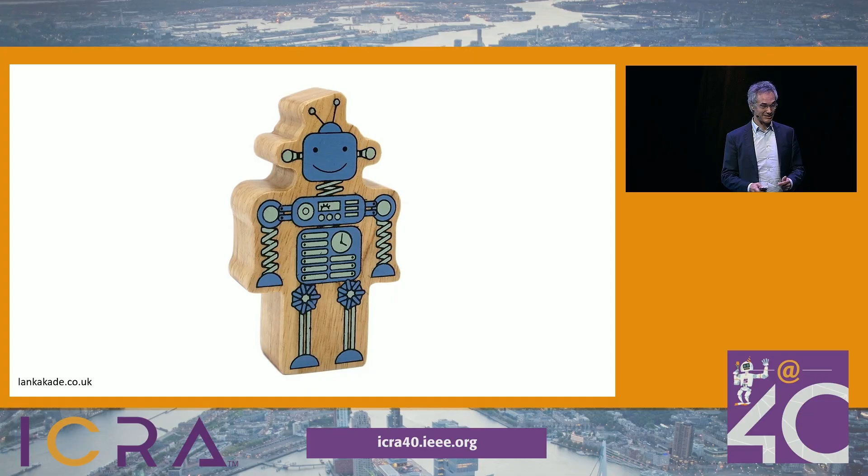Thanks a lot for the very kind introduction. Thanks a lot for having me here. I've been working with robots since 40 years. Okay, that's stretching it maybe a little bit. That's the kind of robots I was interested in back then. I was really busy working on my fundamental motor skills, grasping and these kind of things that enable me now to deal with these kind of situations.

I believe we're still quite a few years away from robots being able to deal with these kind of things, so let's take a look at a slightly more structured environment, like in a supermarket. Doesn't look too bad. We should be able to solve that with good old-fashioned engineering. Almost, but not quite. So maybe a little bit of learning can save the day.

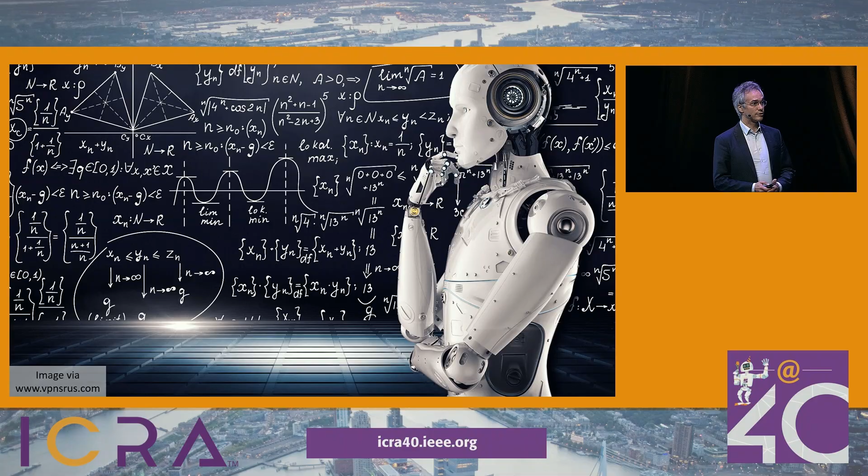We've already heard quite a few talks about robot learning, so I'm going to be very brief. You've heard a lot about imitation learning, the idea of learning from human demonstrations, or reinforcement learning, where the robot is learning by trial and error on its own.

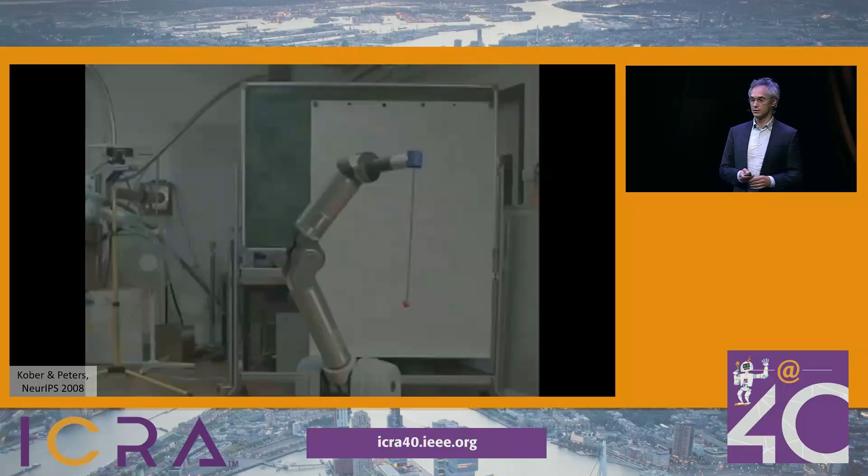Jan already showed this video on the first day, combining imitation learning with reinforcement learning. That kind of gets us in the right ballpark. It takes some 50 trials or so until it gets the ball in the cup the first time, but then another few trials until it's very reliable. What we don't show you in this video, and which is also not in the paper, is how many times Katharina needed to practice until she could show a nice demonstration, and also not how many hours I spent on fine-tuning the reward function to avoid that it gets stuck in some kind of a local optimum.

Now, if we look back again on how humans teach and learn, you'll notice that it's quite different. You won't have a teacher provide just some initial demonstrations or an initial reward function, and then the student or the robot is on its own. Rather, you're going to have intermittent interactions. You have a teacher, a parent, a caregiver, and so forth that are going to provide additional demonstrations, corrections, tips on what to practice, and so forth. You also have that for adults, and even when teaching other agents like this cute dog.

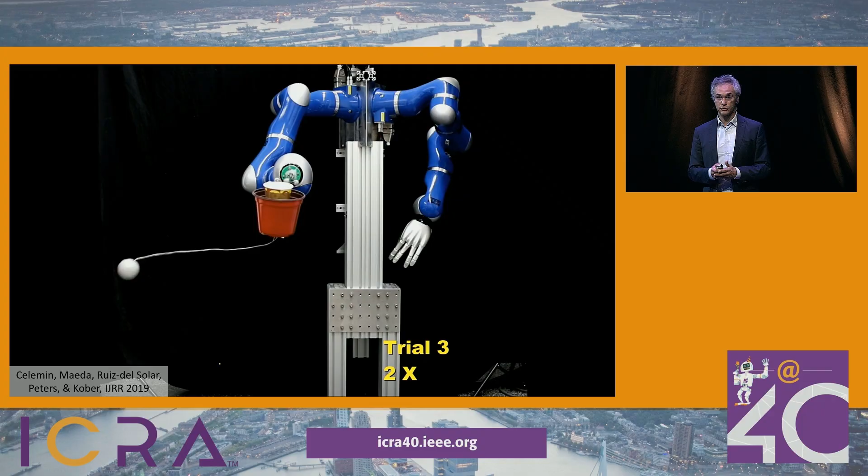So, I believe that introducing this idea is really going to be beneficial also for robot learning. So let's see how that looks like, again, for the ball in a cup example. Now we can start from zero, from scratch, but we additionally have a teacher in front of the robot providing corrections like move more to the left, move more to the right, move faster, move slower, to help the robot out. And then it takes only some 20 trials or so until it can catch the ball in the cup.

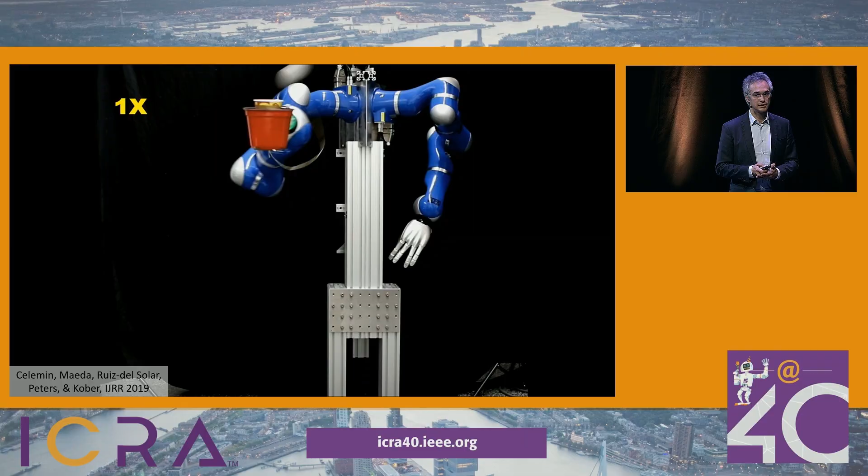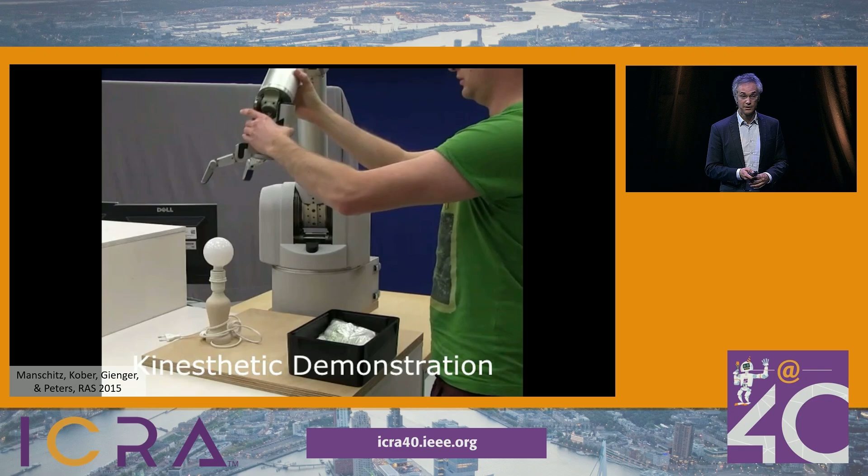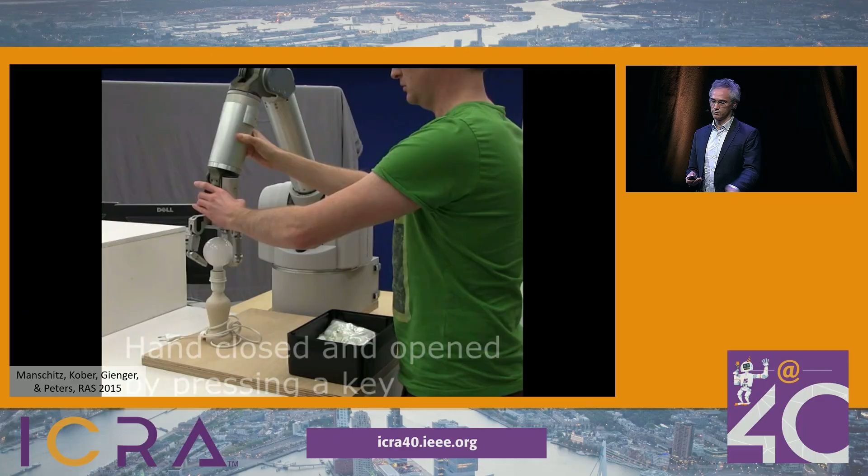So let's move on to something slightly more practical. Unscrewing a light bulb. This is a pure imitation learning example, also from about 10 years ago, where we collected, I think, around 10 demonstrations with some variations in the environment, how many times you need to unscrew, where the light bulb holder and the trash is, and so forth. And then you can learn to reproduce and to generalize this kind of a skill.

But also there, we swept some things under the rug. In particular, the initial set of demonstrations we collected worked fine, but then when testing it, we figured out that we had forgotten some situation. So we went back, collected more demonstrations, retrained the approach, and then you might need to do a couple of iterations. Can we do better?

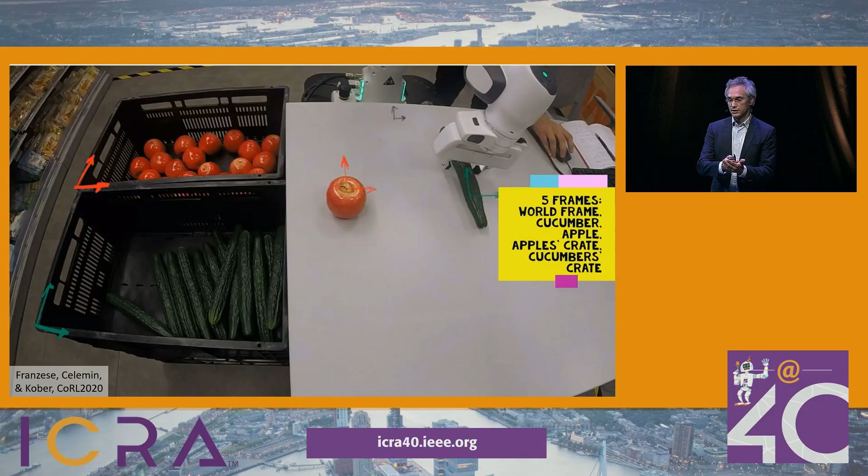So here is another approach some years later that we developed. Here, again, using imitation learning, we taught the robot how to put a cucumber in the correct crate, and that works fine. But now we swapped the position of the two crates, and the robot no longer knows what to do.

Actually, the robot in this case keeps track of what it knows and what it doesn't know. So what it's going to do is it's going to do as much as possible autonomously, and then when it doesn't know what to do, it's going to ask for help from the human teacher. So this little push here helps it to disambiguate the situation, and from then on, it can do the task autonomously.

So not only does this idea of interactive learning help the robot to learn more quickly, but also the human teachers largely prefer this way of interacting with the robot.

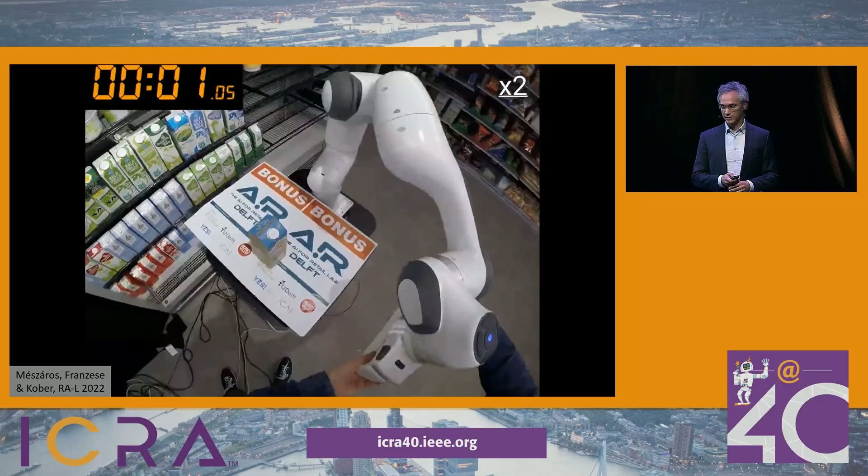Here's another example related to what I was talking about in the beginning. Here the goal is to do some restocking in a supermarket setting and get the milk carton onto the shelf in less than 5 seconds.

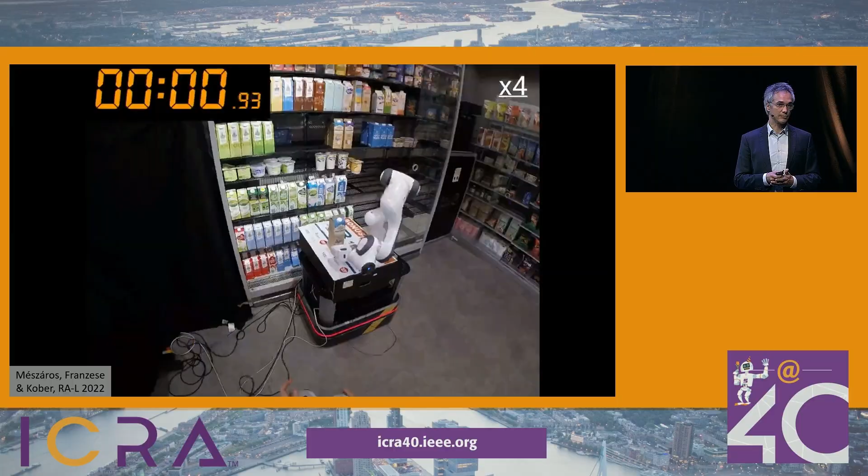Again, starting with a kinesthetic demonstration, you can also use some other ways of getting the initial policy there. Now at the bottom you can see the game controller we used for interactive corrections. We're correcting both the trajectory to make it more robust, but also correcting where to speed up the movement. And then here's the final policy, and it nicely achieves the task very robustly in 5 seconds.

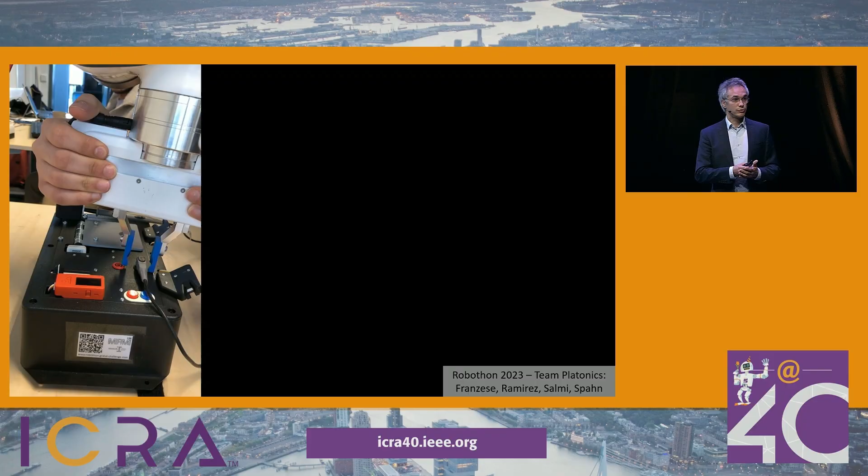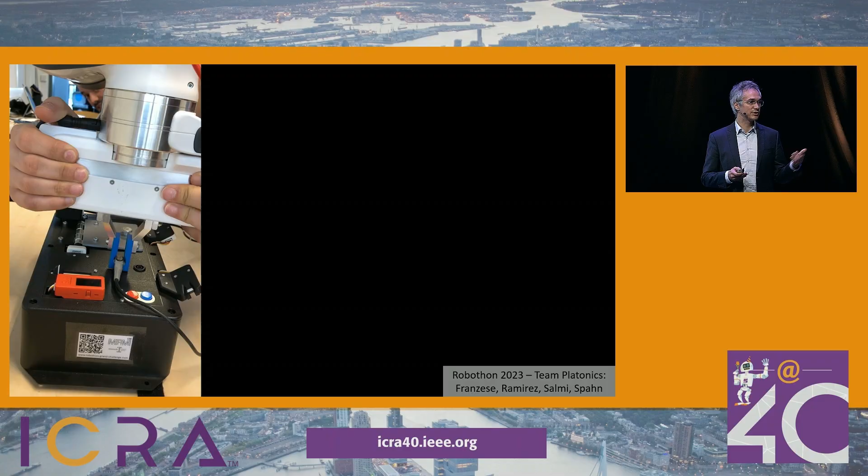The couple of examples I showed you so far were mainly single subsets of a task, and this is an example of how to actually make it work also for more complex tasks. This is from a competition we participated in about 1.5 years ago.

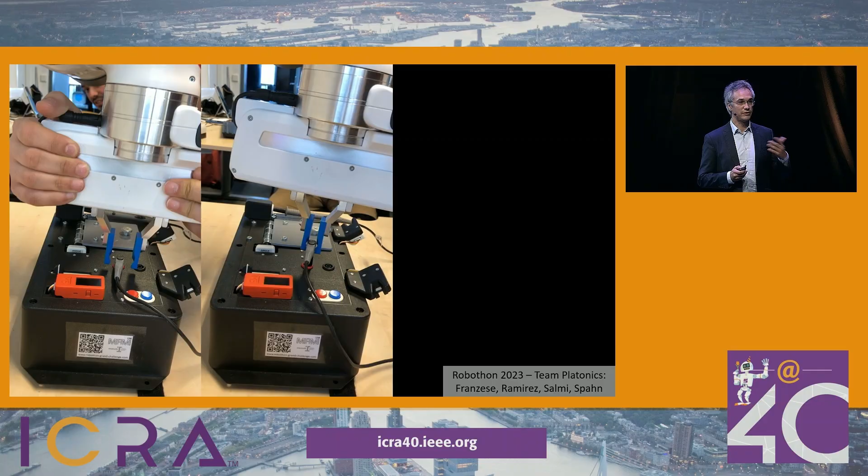Again, starting with a demonstration and then using a combination of imitation learning with some corrections, but then also in this case some failure recovery behaviors using visual input for the really detailed control we need, coupled with a higher level system that tells it in which sequence to execute these subskills.

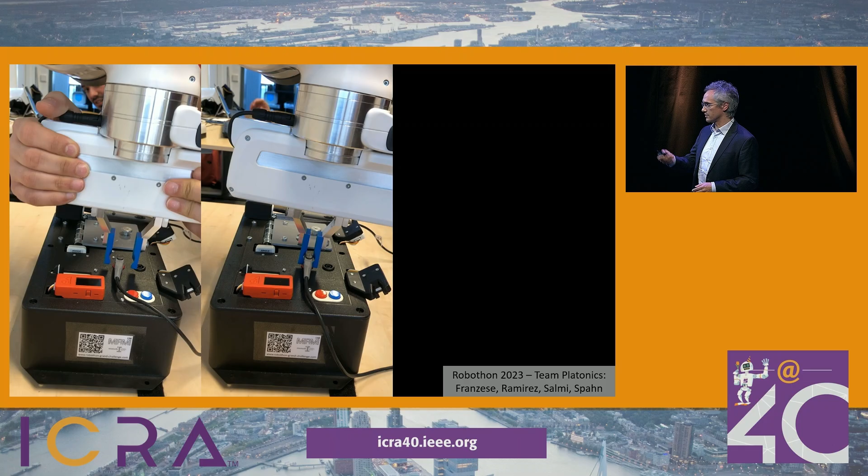I won't have time to show you the whole thing, here's just a little snippet: one of the more precise tasks of reinserting this electronics probe into the socket.

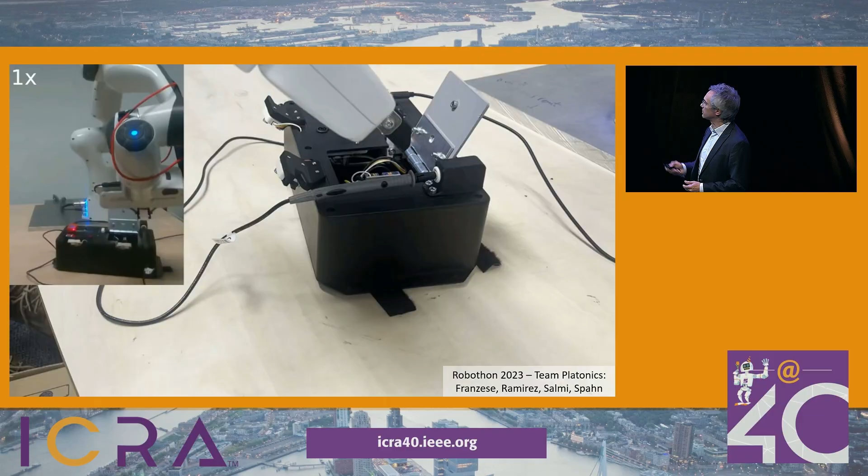And then also here, we really made good use of human intelligence and intuition on how to use the environment to efficiently solve the task of wrapping the cable around these two hooks. So really using the constraints of the environment, and in this case, sliding along the cable to very robustly do that.

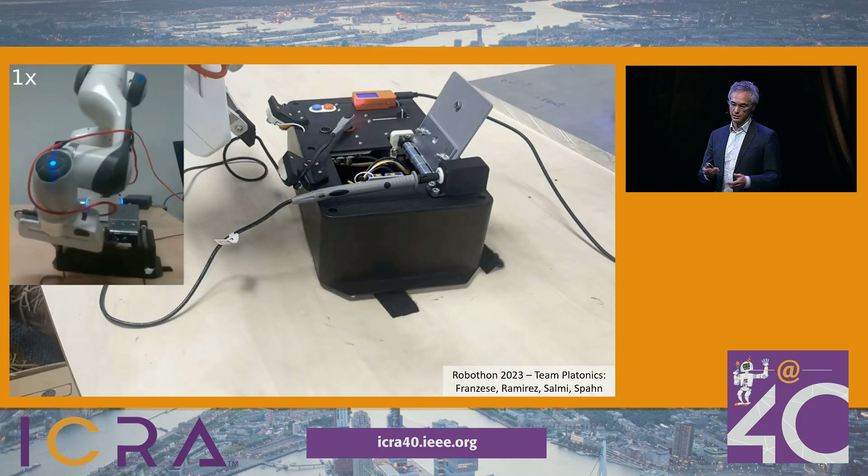I really am interested in making it intuitive for human teachers. There are quite a lot of different ways you can interact with the robot. You could provide action corrections, tell it to correct actions, do evaluative feedback. You can have either the robot active and asking questions, or the human in the lead, or you can try to enable all of those.

We managed to do that, and that looks something like this. Again, a more fun task. It works very well if you have a simulated teacher, or if you are the first author of the paper.

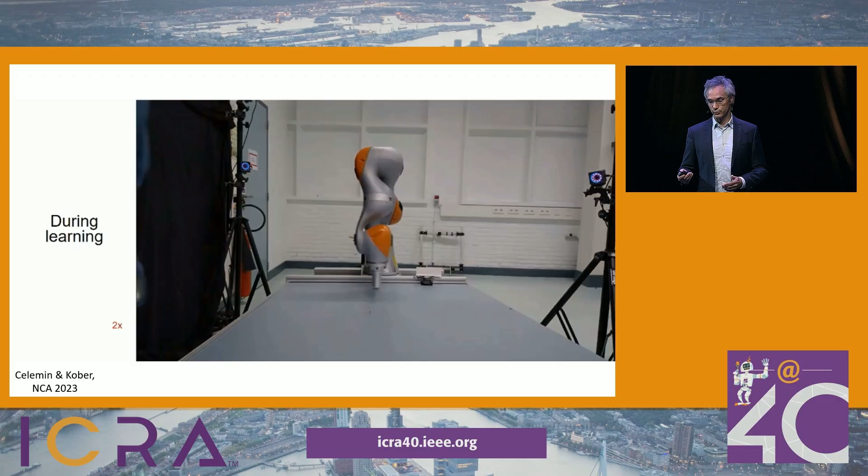However, if you ask your grandparents, probably what they really want to do is yell 'Bad robot' at it. So that means one of the big open questions still is how to get all these very rich ways of interacting and teaching a robot in there - could be language, but also subtle gestures and combinations thereof.

Foundation models will definitely play a very important role in enabling that, but I still believe there's quite some ways to go to really couple these very vague and ambiguous corrections and feedback to different abstractions, and really the physical embodiment and detailed knowledge you need for interacting with the physical world.

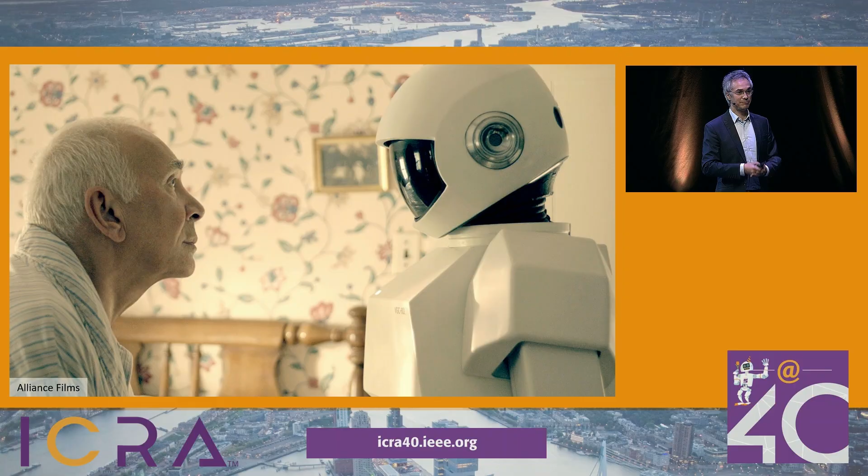So, to sum up, I hope I could convince you that having interactions with the human in the loop is really a very promising way of doing this. And since I started working on it, it has also picked up a huge amount in the robot learning community.

If you haven't watched this movie yet, Robot and Frank, I really highly recommend you do so. It very nicely illustrates how a non-robotics expert, a retired burglar here on the left, needs to be able to teach a robot on the right new skills in the way they prefer, with a very specific manner, even if that's totally out of the distribution we used to train the robot.

And one final thought: it's not only about robots learning from interactions with a human teacher, but it's also about us roboticists learning through interactions with all the stakeholders, like Carmen said this morning, but then also with scientists from other disciplines that really look at how it affects humans - cognitive science, behavioral science, psychology, philosophy, design, law, economics, and so forth.